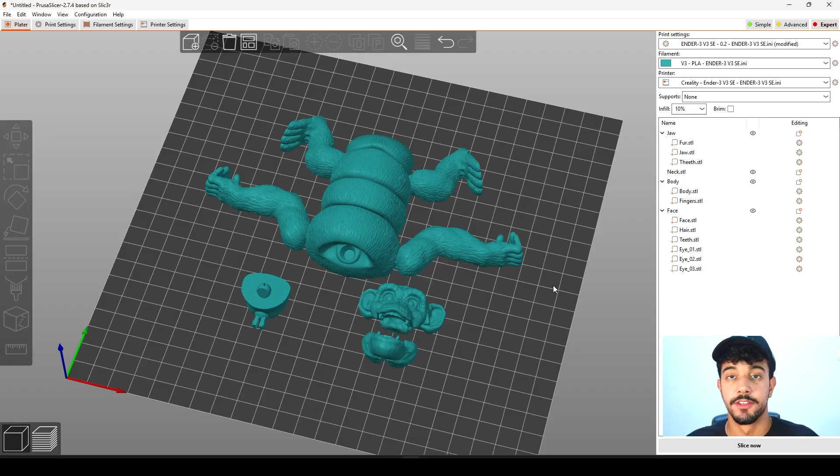In today's how to slice video, we're going to be checking out an awesome wild animal box skull. So let's go to the video. So this is the chimpanzee. As you can see, this is a really nice box skull, and in this video we're going to be checking out the best print settings to print it.

As you can see right here, we got the body. This is the really nice neck, the head and the jaw. So let's go to the print settings. So right here in layer height, we're going to be decreasing this value to 0.16 millimeters. By reducing this value, we're going to have more layers to print. It's going to take more time to print, but we're going to have a finer and better quality.

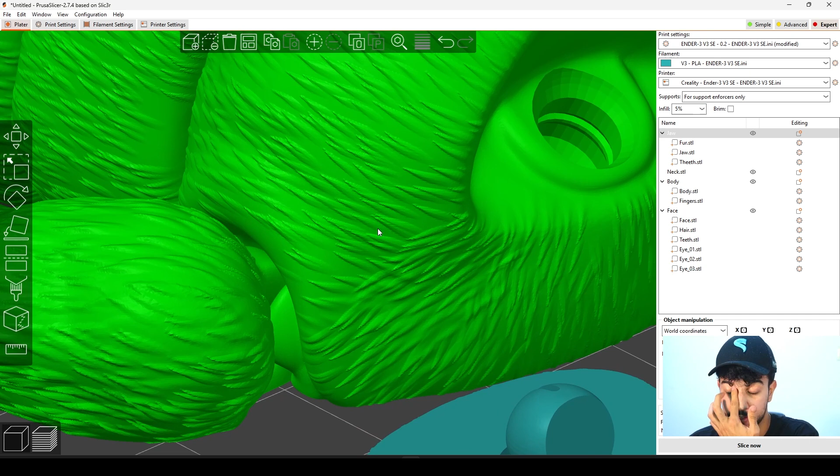As you can see, this model is quite small. By reducing this value, it's going to be harder to see those fine lines of print. So this is all worth it. Going back to the print settings, we're going to be printing with 3 vertical shells. This way, if a kid throws it at the wall, it's not going to break.

Going over to infill, we're going to be increasing to 10% infill with a gyroid infill pattern, because gyroid is a really nice infill pattern because it prints in waves, so your printer never goes in a straight line. This reduces the chance of your print failing while printing the infill.

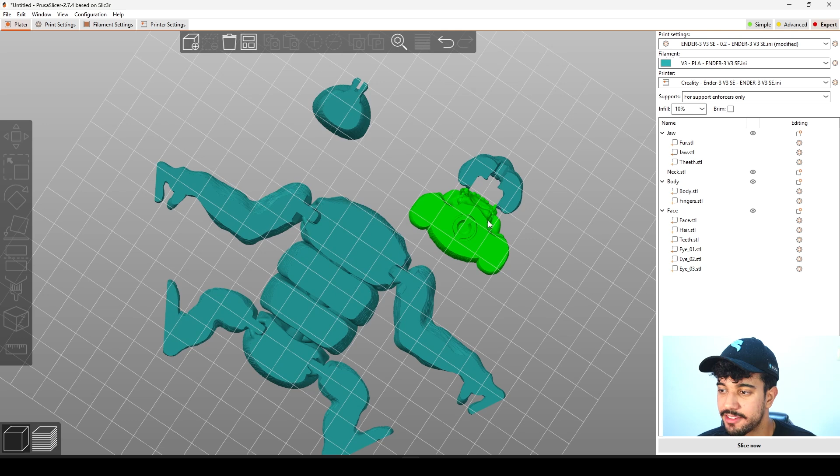Going over to skirt and brim, let's analyze if this model really needs brim. So brim is a really nice feature to increase the surface of contact to the build plate. And as you can see, all of the models got a solid surface of contact to the build plate. We can be printing this model without any brim.

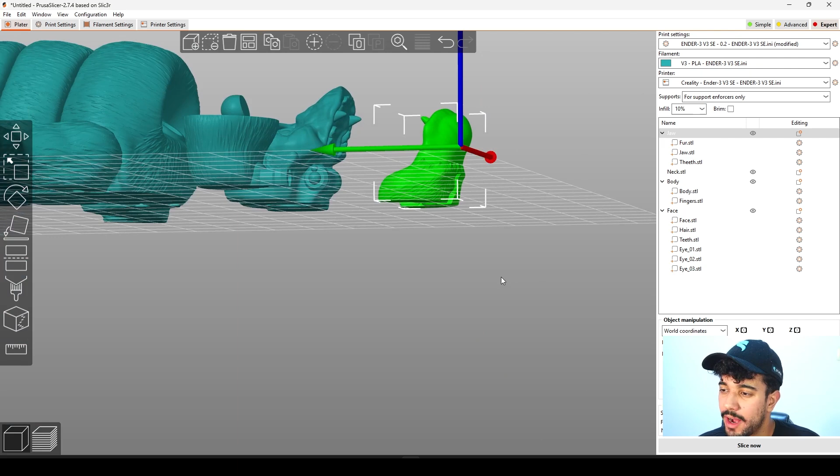As you can see, the most critical part is the jaw right here, because it is quite tall and doesn't have the best surface of contact, but you can be printing without any brim. I do recommend adding brim just to this model if you like, but there are other tips for you to increase your bed adhesion without adding brim.

What you can do is, first off, always clean your build plate really well, so you can have a clean surface to print on. That increases the bed adhesion a lot. Second, make sure that your printer is really well leveled. By having a really well leveled printer, you're going to guarantee a good first layer, and the first layer is the one that holds your model down to the build plate, so your prints do not unstick from the build plate, and you're not going to have any fails.

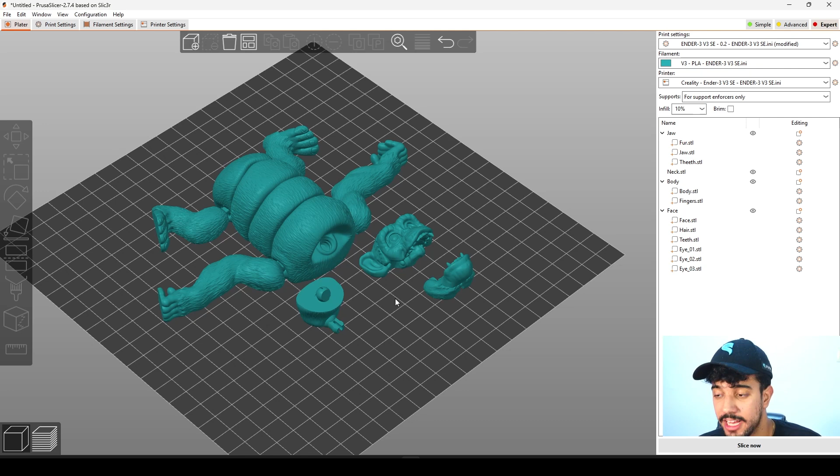Third, feel free to use external adhesion such as glue stick. It helps a lot in some cases, especially on faster printers. So we're not going to be adding any brim. As for support material, we're not going to be adding any because this model is optimized for printing. This is really nice with STLFlix models.

As for speed, feel free to print this model with your standard print speed, especially for Bambu Lab printers. Feel free to print with a profile that you like, but if you're going to change these values, always go to lower speeds. Better to print slow one time than try to print really fast and have it fail multiple times. So print really slow to guarantee a good quality print and good cooling.

Right here on first layer, I have reduced from 30 millimeters to 20 millimeters a second. So that is quite nice. You know the importance of having a good first layer. So feel free to change. Printers vary, so the speed is going to vary too. There is no such thing as the right speed. It's going to vary between printers, but always slow values.

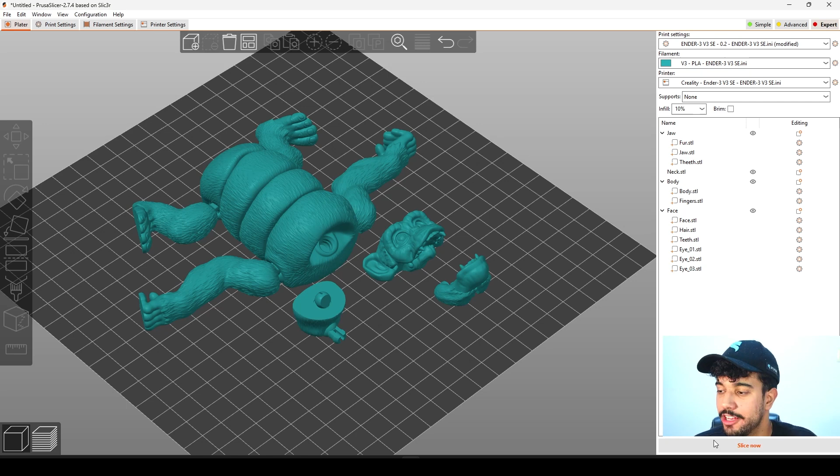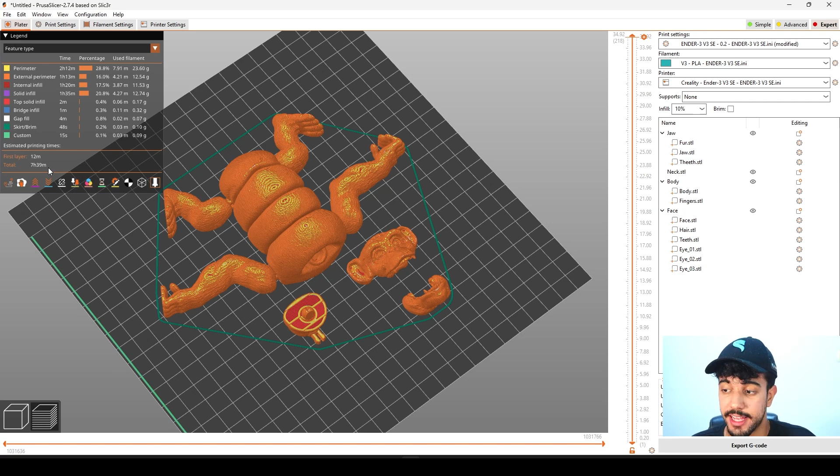So now we are ready to slice. As you can see, we have sliced and it looks quite nice with all of the layers printed out really nicely right here. The first layer is quite nice. Feel free to add external adhesion. It's going to take 7 hours and 39 minutes on the standard Ender 3 V3 SE. It may vary for printers.

So this is a really nice model. Feel free to print it multicolor. Always remember to put more models on a single build plate. This way reduces the proportion of filament waste. So grab a really nice filament and print this model right now. Enjoy. So the model is ready to print.